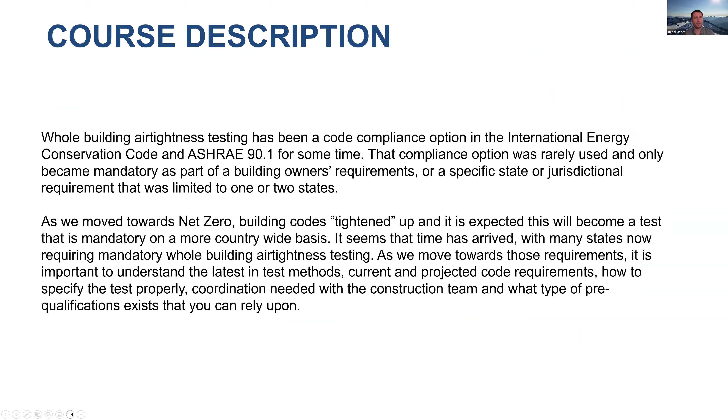So I'll just skip through the boring slides here. Essentially how it fits into the codes, energy codes, and some other green building programs, what that means for us now. We're going to talk about the current building code requirements, both national and some local code requirements, as well as some eco-friendly building programs that are getting more and more popular these days.

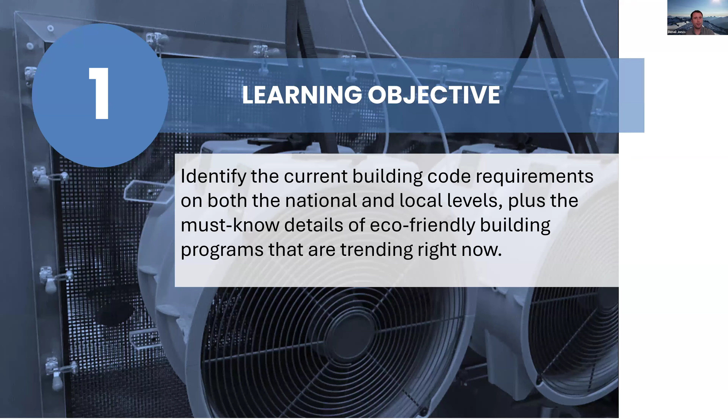We're going to talk about what the air tightness test does, what it provides us, and how those results can actually be useful. We're going to talk about the different test methods that are available, and you'll see a number of different test methods. We're going to break down why they're important or why they're applicable in certain situations and not others. We're going to go through some sample language from a guide spec and talk about some of the pitfalls that I see in specs all the time, how to avoid those.

And we'll talk a bit about some credentialing programs that you can specify that can help ensure that the people testing your buildings are qualified and know what they're doing. So we've got a lot of different supporting documents that the ABAA can provide you, including just things like this presentation. We're happy to deliver to local chapters or building enclosure councils or just even architecture firms. Education and outreach is a big part of what we do, so if you're interested, we've got lots of presentations available.

We also have a whole building airtightness testing manual that's actually for sale. That's one of the few things we provide that's not free, but it's a huge document that explains everything you need to know about whole building airtightness testing, and probably a lot that you don't need to know. It's hundreds of pages, essentially a textbook.

On the left side here, we have hot off the presses two new guide specs, one for air barrier requirements, and one specific to air barrier testing requirements. Those were just approved by the board literally days ago, so they're not published on our website yet, but they will be very soon. The testing spec also includes a report template, which is that document with all the yellow highlights. We're trying to standardize the industry as much as possible, so everyone's testing the same way, everyone's reporting the same way, and we can compare apples to apples. That's a big goal of ours, making sure everybody's on the same page, doing the same thing, and doing it right. So we've got a lot of different stuff we can provide that's helpful to specifiers, contractors, testers, you name it. We're a resource for the industry.

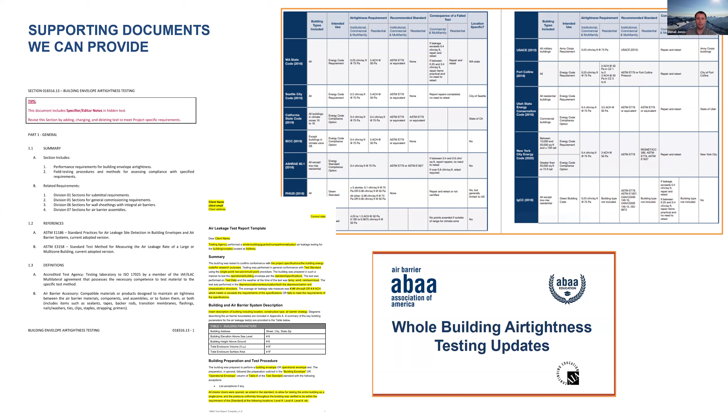But today we're going to talk about whole building airtightness testing. So we'll start big picture with the national code requirements. For a long time it was really just this dichotomy of test methods.

There's the material test, which is purely testing the airtightness of a single material, like a sheet membrane, a foam panel, or even just a piece of sheathing. Nothing else there. Then the next step up is the assembly test, where you test the air leakage through an 8x8 mock-up wall that's got penetrations, fasteners, electrical outlets, a fake window in it. So that's a bit more complicated, a bit more expensive.

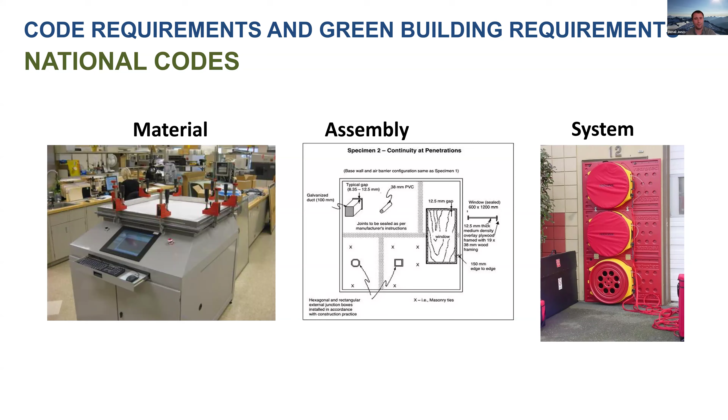And then the system test, or the whole building test, is exactly what it sounds like—you test the entire building as constructed. The codes, both IECC and ASHRAE, for a long time broke it down this way: you could either test the materials used for the air barrier and confirm they're airtight, test all the assemblies used and make sure they're airtight, or test the whole building. Surprisingly, not a lot of people chose testing the whole building—you can imagine that's a fair bit more complicated and expensive than just testing a material or an assembly.

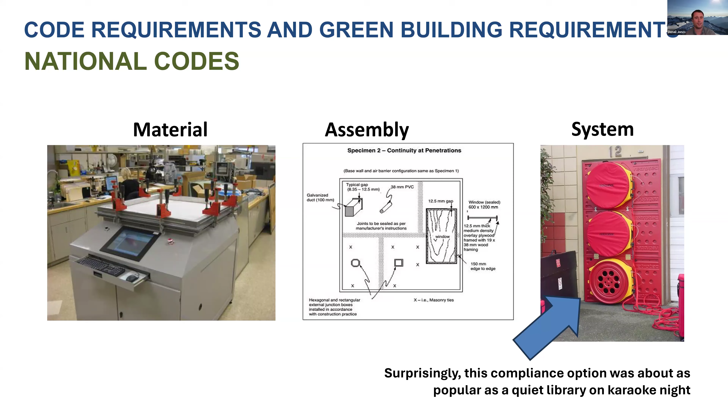So here are some of the requirements, this is from IECC—ASHRAE was really similar for a long time. The material test is ASTM E2178. The requirement to be an air barrier material is 0.004 CFM, cubic feet per minute, per square foot of the material, at a pressure difference of 1.57 pounds per square foot. So they pressurize across that material. The ASTM test calls for a 1 meter by 1 meter sample, and they measure the leakage rate of air through that material. If it's less than 0.004 CFM per square foot, or 0.02 liters per second per square meter, then it's deemed acceptable by code as an air barrier material.

And that requirement's still in there, still in the code, and they provide a list of materials that meet it. That requirement, the 0.004, actually came from drywall—that's where we got these requirements from. Historically, drywall was used as the air barrier on the interior side of the wall. They would just caulk all the penetrations and tape and mud all the drywall joints, and that was it, that was the air barrier. So when they were writing these code requirements, they just said, let's test a sheet of half-inch drywall and see what the leakage is. And they did, and it was 0.004 CFM per square foot—that was the number they got. So they said, okay, anything at least as tight as drywall is good enough as an air barrier.

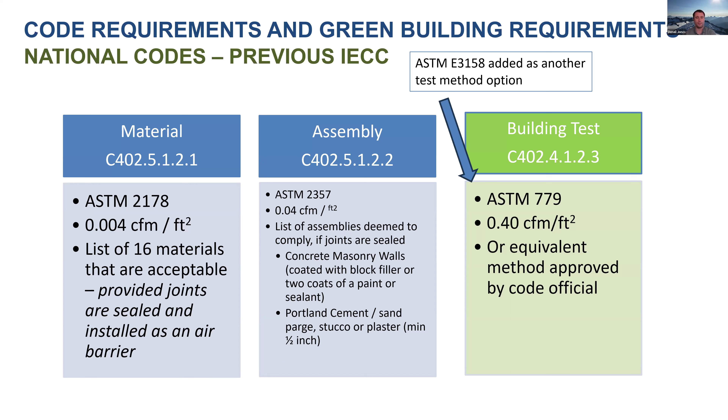These are just excerpts from a table in our manual, but these apply as an option for compliance. So the code essentially says you have to have an air barrier, and how you demonstrate compliance is either testing the whole building or using all airtight materials or airtight assemblies.

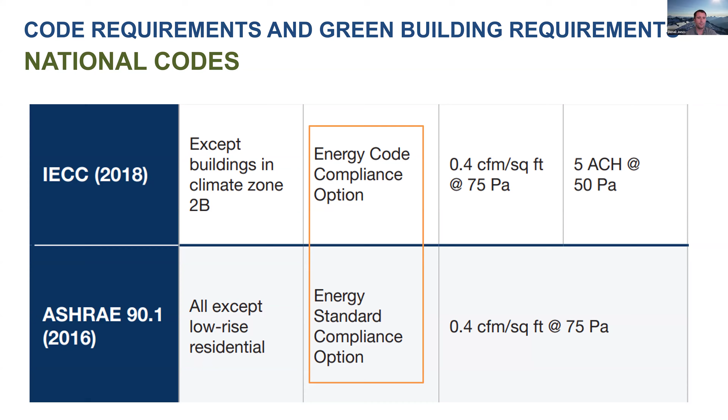So you have to meet the code, whatever the code says in your jurisdiction. But then you also might have additional requirements from green programs such as Passive House, or LEED might have test requirements for whole building airtightness as well. Or there could just be an owner that wants an airtight building for one reason or another.

A lot of institutional building owners tend to want higher performing buildings. So we see that in specs all the time where it's a hospital or a university or somebody that really cares about the performance and the durability of their building. They might specify something that's above and beyond code.

So you may have test requirements that are kind of conflicting, or one supersedes the other. The code is just the bare minimum, and then you may have some other requirement on top of that that should be clearly defined in the spec.

So let's talk about the national codes. I'm going to focus mostly on the 2024 IECC, which is an updated version of the 2021 IECC. But 2021 is where a lot of things changed dramatically in terms of test requirements. This is a little chart I put together, which is a bit hard to read and convoluted, so we're going to go through it in more detail here.

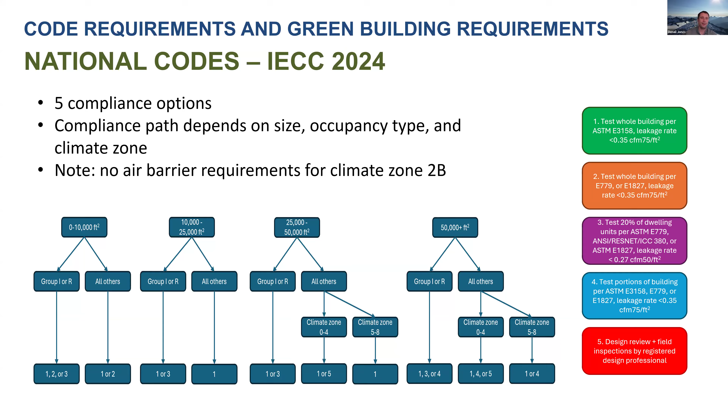All right, so if we break this down a little bit, let's look at smaller buildings. You'll notice anything under 25,000 square feet, there is no distinction between climate zones—it doesn't matter what climate zone. You'll also notice that option 5, the design review and field inspections, that is not an option in any of these scenarios. So essentially, if you're under 25,000 feet, you have to test. There's no exception around it—you just got to test. And what type of test you can do is really going to be any of the first 3 options: test the whole building or test a percentage of dwelling units.

And that's how they handle smaller buildings. So group I or R would be something with dwelling units—that's multifamily apartments, residential buildings, and essentially anything that has a long-term sleeping unit, dwelling unit. So not like a hospital, but maybe a long-term care facility.

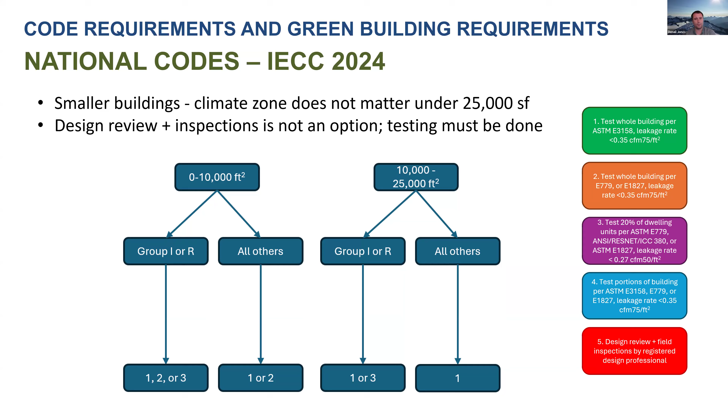You'll notice option 2, that's testing the whole building per ASTM E779 or E1827. The reason that's allowed is these are smaller buildings, and we'll talk more about that in a later slide, but really for larger buildings, you don't want to be using those test standards. That's why option 1 is really the only option for larger buildings, which we'll see here. This is where option 2 goes away if we're above 25,000 square feet. So this is 25,000 square feet plus.

This slide here—you'll see that colder climates are definitely more restrictive. And then once we get above 50,000 square feet, that's where partial building testing is allowed. So you're allowed to test just a sampling of the building itself.

And then this option 5, the design review and inspection—so omitting testing altogether—that's only available in warmer climates, so climate zones 0 to 4. Climate zones 5 through 8, you have to do some kind of test. You cannot get out of it.

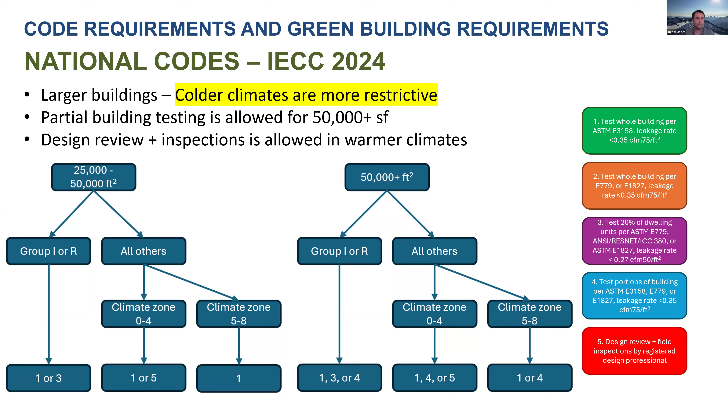Now, what do we do if the test fails? Well, there is what we call an oops clause—that's not what's written in the code, but this is the name we've come up with for it. So if you're going with option 1, 2, or 4, basically, if you test and the result is greater than 0.35, which is the code requirement, so that's a fail, but it's less than 0.45, then you're in this kind of in-between zone where it leaks bad, but not so bad that it's a total disaster. So you find leaks—that's a different standard we'll talk about here in a little bit, ASTM E1186, how you would find the leaks—and then report the leaks and propose corrective actions to the code official and the building owner.

And then that's it. There's no requirement—well, you're required to, I think it has language around, you're required to fix leaks that don't require tearing stuff off the building. So they won't make you pull cladding apart. They're not going to make you reglaze windows or anything like that. But if it's kind of low-hanging fruit, just easy stuff that was missed that you can fix without destroying the building, you're required to fix that, but nothing else.

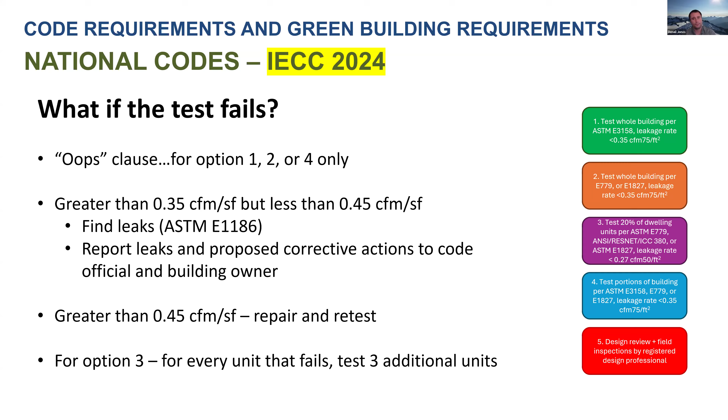All right, so let's talk about ASHRAE. The ASHRAE 90.1 is actually simpler than IECC. You'll notice that option 3 and 4 are not part of ASHRAE 90.1.

They have essentially the same language around testing the whole building, if it is, and their threshold is 10,000 square feet, so it's even smaller. Essentially, if it's 10,000 square feet or less, you have to test the whole building.

And they have a very similar oops clause. It's also 0.35 to 0.45, that's the range. If it's greater than 10,000 square feet, you perform the whole building test, or you can do that option 5.

And there's no distinction for climate zone or occupancy type. It's the same regardless. There are a couple other exceptions for semi-heated spaces in climate zone 0 to 6 - don't need to do anything. And then single wythe CMU buildings only in climate zone 2B, you don't need to do anything. Some kind of weird legacy exceptions in there, but that's kind of the way ASHRAE 90.1 breaks down.

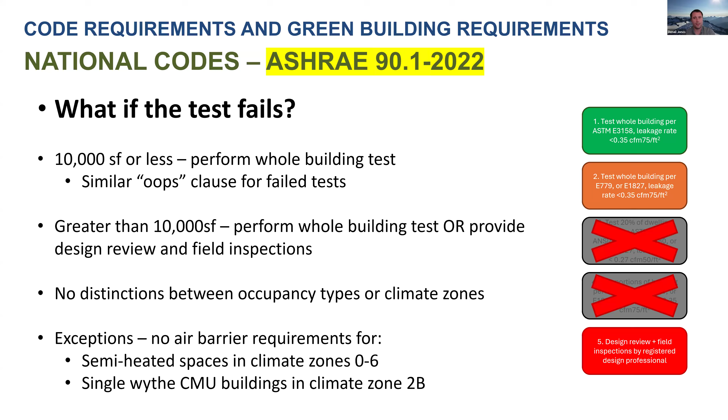So let's talk a bit about local jurisdictions. This is where it gets really complicated because so many different jurisdictions take either IECC or ASHRAE 90.1 and modify it or do their own thing with it.

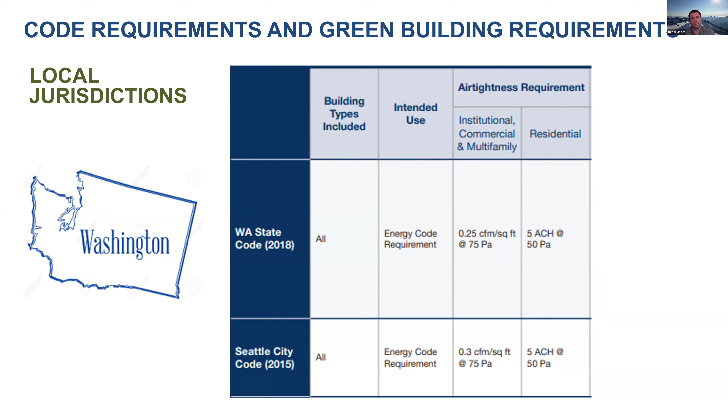So one example is where I live - I'm in Seattle. So Seattle, there's first of all the Washington State Energy Code, which is based on IECC. They took that code and made it more stringent. And then the city of Seattle actually took that and adds additional language around it as well. So there's so many different variations of this throughout the country.

So a failure in Washington State - this is from the 2015 code, I think, it's a little different now - but essentially, if leakage exceeds 0.4, then you have to repair and retest, which is above and beyond what the national code says. And if it's between 0.25 and 0.4, that's sort of the oops clause there that comes into play for Washington State.

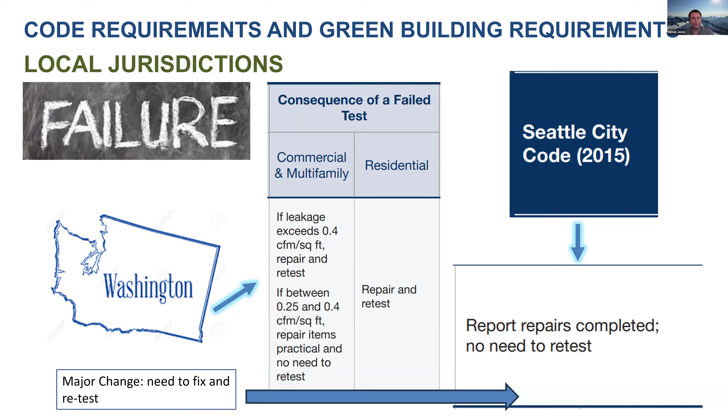So this is a big deal to know what's required in your local jurisdiction. I don't know if we have any Californians in the chat, I haven't looked yet. But California has their own climate zones because they're special, and they've got requirements in certain climate zones and not others for testing and retesting if it's a failure.

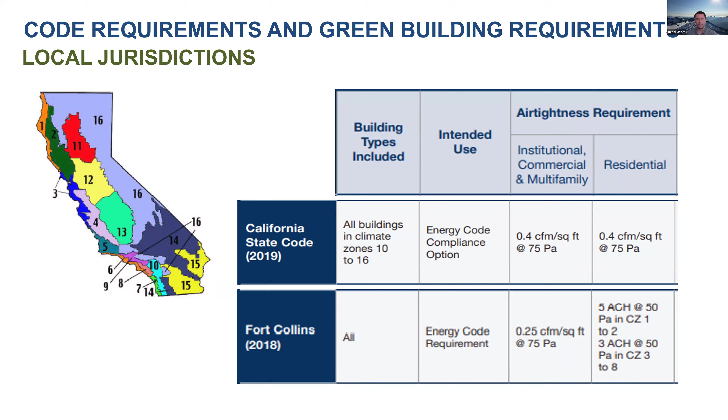Fort Collins is another example of a local jurisdiction that has a pretty strict air barrier requirement that the rest of Colorado does not. And then in the California State Energy Code, if you fail the test, there basically isn't any consequence - you just have to report that you failed. You don't have to repair, or at least that was true back in 2019.

But Fort Collins, however, they have no oops clause. If you fail, you fix it and retest and keep retesting until you meet it. So very different scenarios for doing the same type of testing.

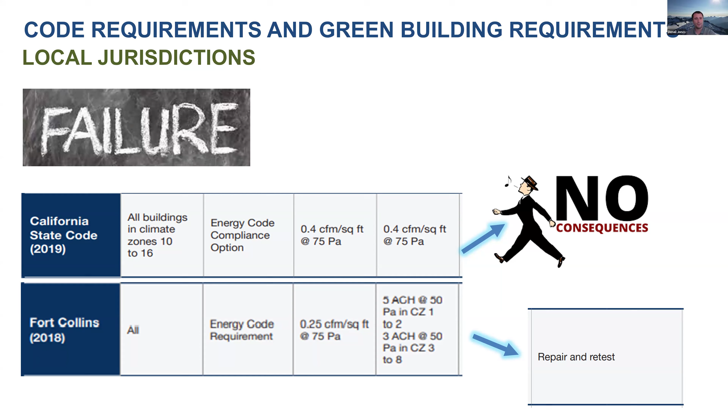So this is why I get asked frequently, hey, what are the code requirements in, I don't know, Cincinnati or Phoenix or whatever, and I always have to say, well, I don't actually know that because there's so many different variations of this in local jurisdictions that I'd have to spend the time to look it up. So you got to know the code in your local jurisdiction.

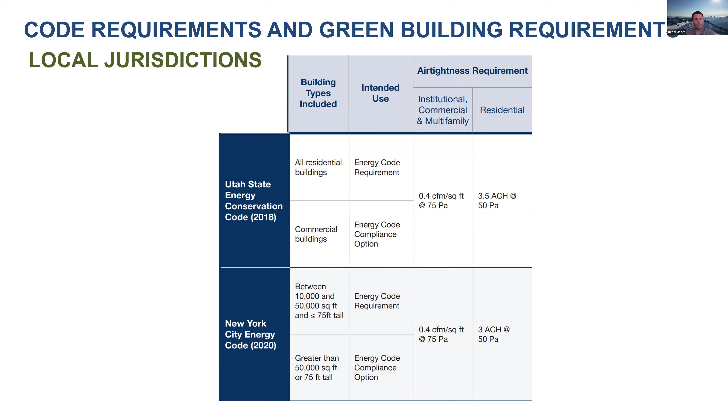Utah is another one that has requirements for some buildings and not others, and it's different for residential versus non-residential. New York City has requirements as well. And so lots of different ways that you can test, and also what happens if you fail is going to be different in a lot of cases.

Green building programs - two of the big ones are Passive House and LEED. You'll notice, the current IECC requirement was 0.35 CFM per square foot. Passive House, which is kind of the gold standard for airtightness, is 0.08 CFM per square foot - so way tighter than the code minimum. Just to give you some perspective on what a really tight building is, that would be Passive House.

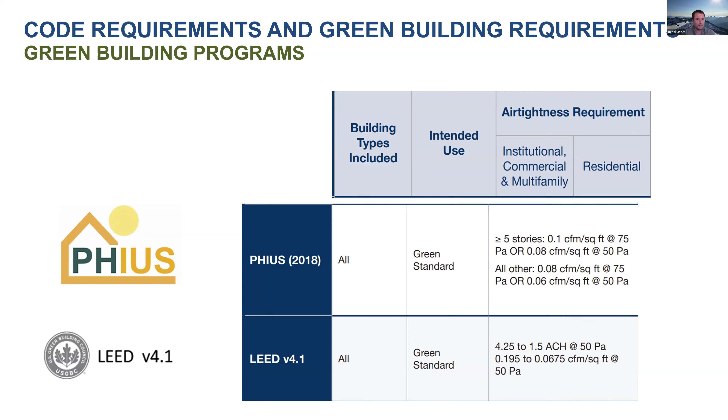LEED also has some requirements for various points that you can get. And the consequence of failure for these is pretty cut and dried. If you don't meet the Passive House requirement for airtightness, you don't get certified as a Passive House project. If you're going for LEED points and you don't meet the airtightness goal, you don't get those LEED points. Period. There's no oops clause.

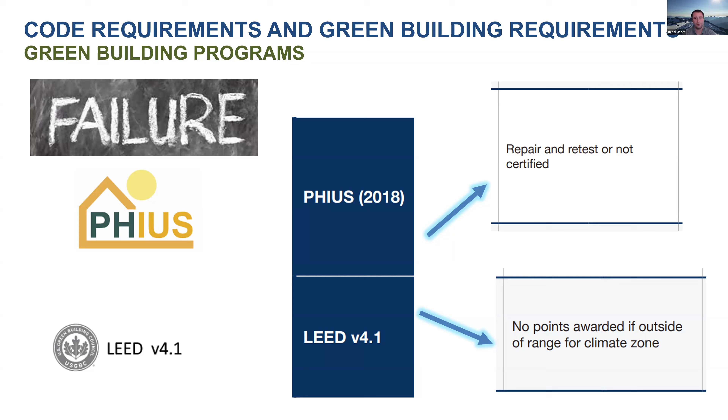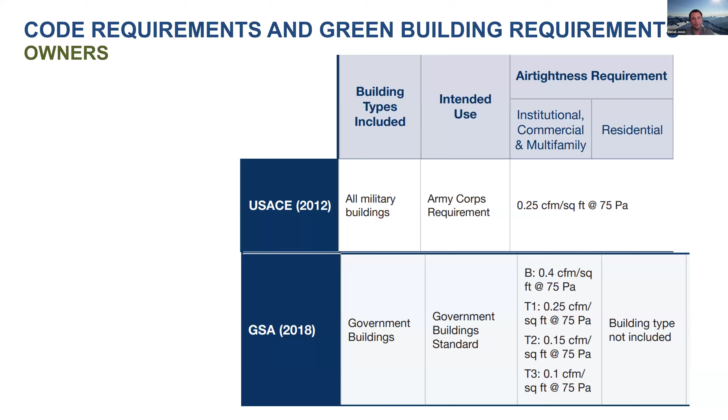There's nothing like that, it's just you have to meet those requirements, or you don't comply with the green building program. The Army Corps of Engineers has been doing airtight buildings for a very long time, which then kind of bled over into the GSA for any federal government building. They have different tiers they can meet, and those are both pretty strict. If you don't meet those, you have to repair and retest.

Let's talk about the different test methods. I've talked about a lot of different ASTM standards here. There are many more, but I don't want to get too far into the weeds on this, so I'm going to try and keep it high level.

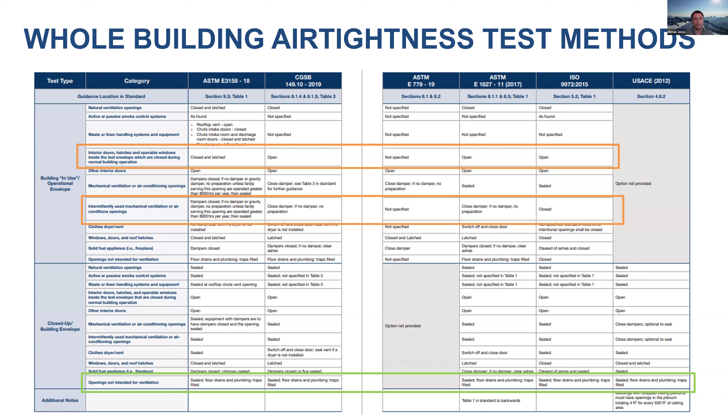This is another one that's really important: pressure uniformity is going to be essentially the same or very similar for a lot of these test standards, and we'll talk about why that is here.

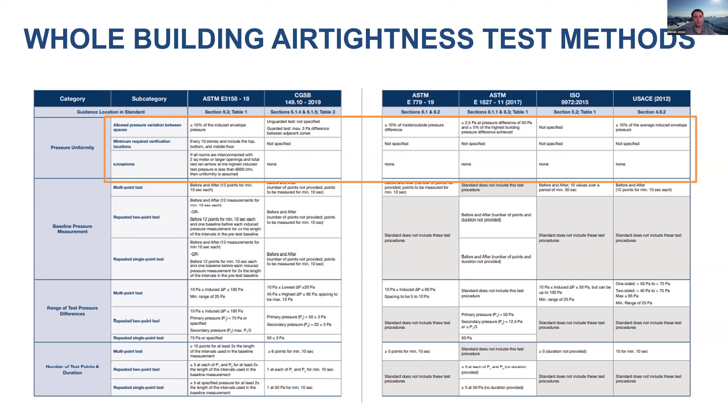But let's first get into the basics of what whole building testing is. In the simplest version possible, think about a fixed volume, which is your building. Any flow you put into the building, air that you pump in, has to equal the flow out of the building, assuming the pressure in the building is constant. So constant volume, constant pressure, flow in equals flow out—that's conservation of mass.

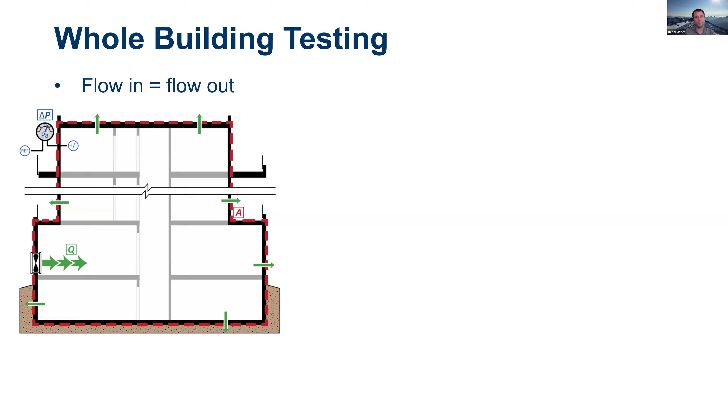Our flow in could be through the blower door, which is just a big fan. Our flow out is the leaks, since we're trying to measure the leakage of the whole building. So we close all the windows and doors, seal everything up, and blow air in through the fans. Then we assume that flow out is going to be the same as the flow in. So it's a funky thing—you're not actually measuring airflow through the leaks, you're measuring airflow through the fans, and then assuming it's the same as the air out through the leaks.

Where it gets complicated is as the building gets bigger, you can't just have one fan blowing air in. You need a bunch of fans—a lot more volume of air than one fan can do. So you've got to link all those fans together, measure pressure in a whole bunch of different places, and control everything simultaneously. That's where this gets tricky. But conceptually, that's all you're doing—blowing a bunch of air in, measuring it, and equating that to flow going out through the leaks.

The reason you have to measure a bunch of pressures is you want to make sure you're actually getting the same pressure throughout the whole building. We call that pressure uniformity. So if we've got a 10-story building and a bunch of fans on level 1, we want to make sure we're actually getting the same pressure on level 1 as we are on level 10, so the air is actually reaching every part of that exterior envelope.

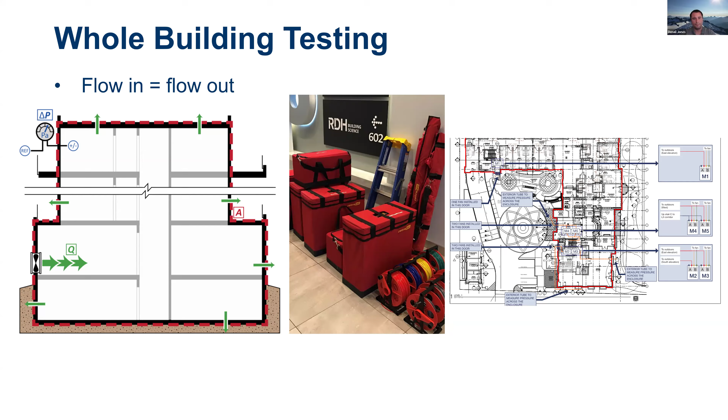Actually, it's a bit of a misnomer to say we're measuring airflow—we're not actually measuring airflow, we're measuring pressure. The fans have openings on the inlet side, and we're sucking air through that opening. We know how big that opening is because it's been calibrated to a specific size and shape. So we measure the suction pressure, called the fan pressure, through the fan across that inlet. Then we know what the flow is through that opening because we know its size and shape, and we know the pressure across it. So it's all just measuring pressures, really. But we can quite accurately determine how much flow is going through each fan, add that all together, and then we get our leakage rate.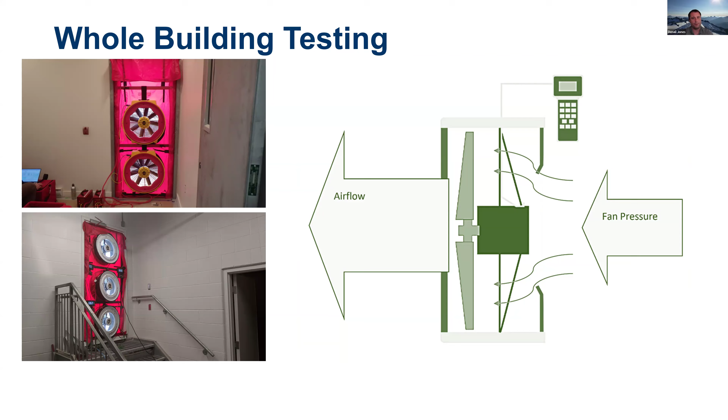So this gets difficult in a number of different ways. Very tall buildings or very large indoor-outdoor temperature differences can make things difficult. If it's really cold outside and warm in the building, that's tricky. Lots of wind or highly variable wind can make things tricky when you're trying to measure stable pressures. Buildings with multiple zones—I'll talk about why that's tough. Leaky buildings are just harder to test in general, and multifamily buildings—I'll talk about why that is too, in a second.

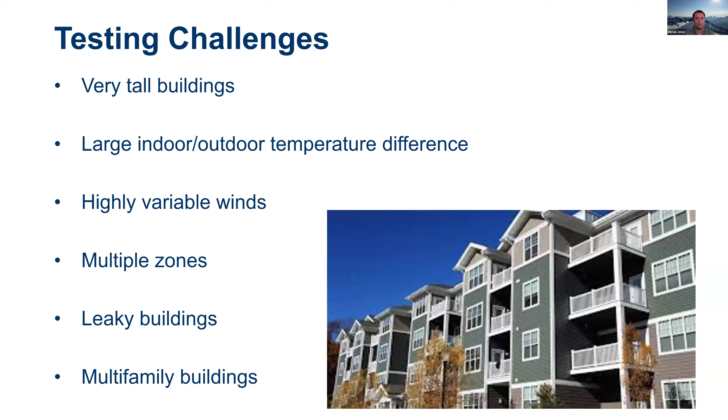So the first two are kind of one and the same: very tall buildings or very large indoor-outdoor temperature differences. This is due to the stack effect.

Stack effect is really just the fact that warm air is less dense than cold air. The warm air will rise to the top of the building, and it's going to try to force its way out, which draws cold air in at the bottom. So you get a positive stack pressure at the top, pushing out, and a negative stack pressure at the bottom. This is also sometimes called the chimney effect, and this is how chimneys work.

But this can be difficult in tall buildings because it's proportional to the height of the building, and also the temperature difference. Those are the two things that make the stack pressure bigger. Taller building, more stack; bigger indoor-outdoor temperature difference, bigger stack. Your fans basically need to overcome this stack effect, and the bigger it is, the harder it is to overcome. This is only a severe limitation in very cold climates or in very tall buildings.

I'm talking like 30, 40 stories plus - that's when it can start to get tricky. So this is a pretty small subset of buildings where this is really a big factor. But it is something to know about if you're working on a high-rise building in Chicago and it's going to be tested in January - that could be an issue. That could be something where you'd consider testing portions of the building and not the whole building.

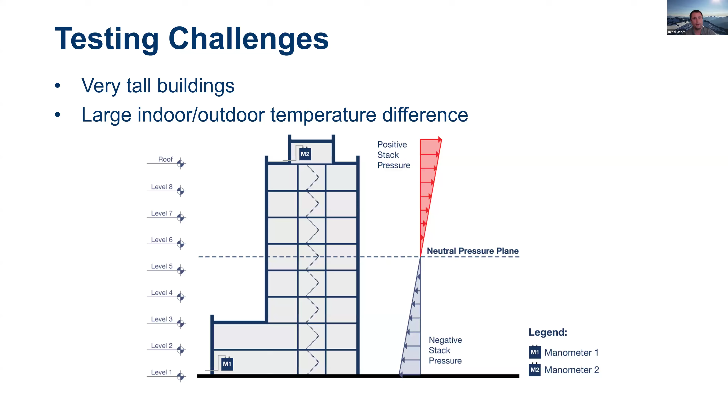Wind is the next one. Fairly obvious why this is a problem - you're trying to get stable pressure readings, both indoors and outdoors, and that's hard to do if it's a really windy day. So this can make testing quite challenging.

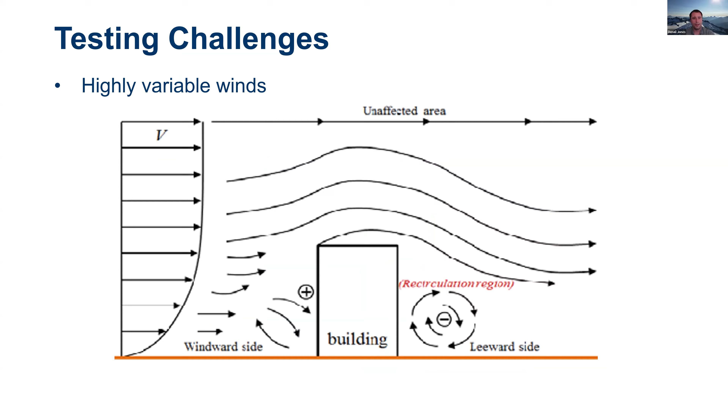Multiple zones can be difficult, and this is really just logistically challenging from the testing point of view. You've got to make sure that if you're testing the whole building, but it's chopped up into different sections, you simultaneously pressurize those sections and get them to the same pressure all at once. So that's difficult to do. Sometimes this is just inevitable and you have to do this with the way the construction sequencing goes, but it makes it challenging.

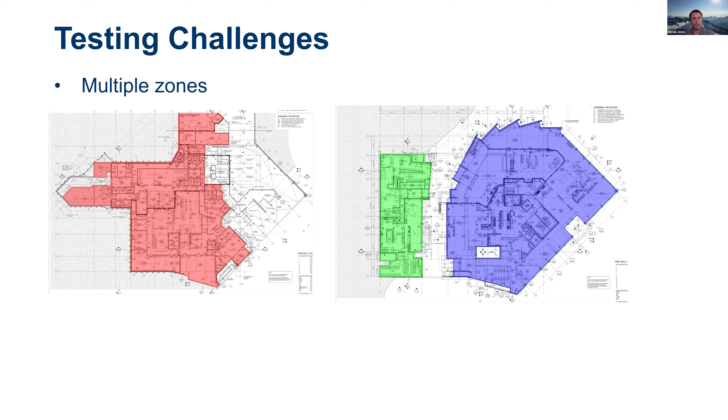Leaky buildings and multifamily buildings are kind of lumped together because they are one and the same a lot of the time. Multifamily is leaky just because you've got a ton of different penetrations - exhaust penetrations, range vents, bathroom vents, dryer vents - usually something like four exhaust fans per unit. You've got your stove, your bathroom fan, your dryer, and then usually another whole-house ventilation fan somewhere.

So the goal of the test is to measure leakage through the air barrier, not measure leakage through the HVAC systems. It's trying to figure out how well put together all the sealant joints, tapes, and membranes are - not how much flow goes through your ductwork. That's kind of a different concern.

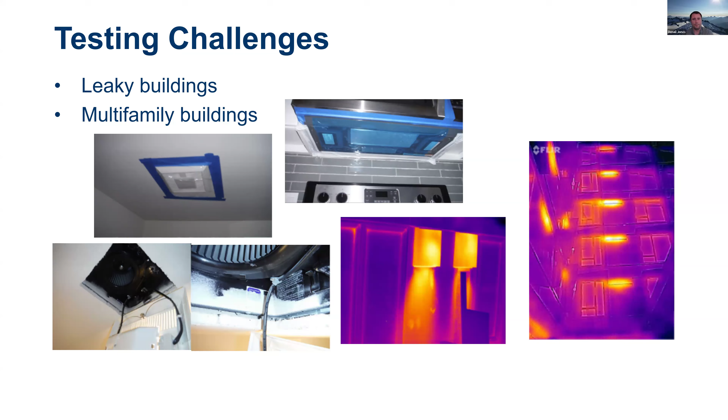All right, so let's talk about multi-point testing. This is what we're actually doing when we're getting data - we're measuring pressure and measuring flow at multiple different pressures. This allows us to develop a characteristic flow curve for the building, so we can actually tell you what the leakage rate is at any pressure.

So we're reporting the leakage at 75 pascals, or 1.57 pounds per square foot. That's what the code requires for reporting, but we're actually testing at a bunch of different pressures.

This would throw up a lot of red flags in the testing software telling you to go check this out. But if you were just to test at 75 pascals, crank your fans on and get a number, you wouldn't know this is happening. You'd have no idea because you only have one data point, so you don't really know how good that data point is. You don't have that smooth line to tell you the building is holding steady and nothing's blowing open.

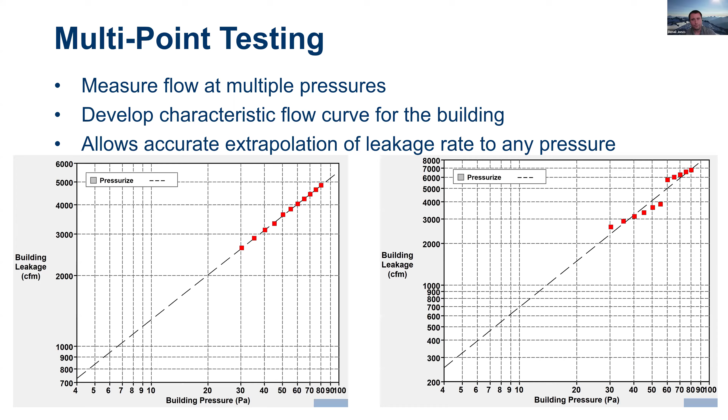ASTM E779, this is one of the multi-point test methods. It was kind of the gold standard for a long time, the only thing that was around. It was developed in the 80s and was really written for testing single-family homes. Nobody was testing large buildings back then.

If you read through this carefully, it's got really strict limitations on weather conditions. It requires testing at really low pressures, so if you're trying to get a stable reading at a low pressure, things like stack effect and wind are really, really difficult and prohibiting to test at. It offers very little guidance on how to actually prepare the building. It talks about stuff like closing the chimney flue, and it's very clearly written for testing a house. It has no guidance on what to do with a DOAS system on the roof or an elevator pressurization fan. It's not written for those types of buildings.

So a lot of the guidance on how to prepare the building is very limited and kind of left up to the tester's interpretation. It also only requires taking 5 data points, so flow at 5 different pressures.

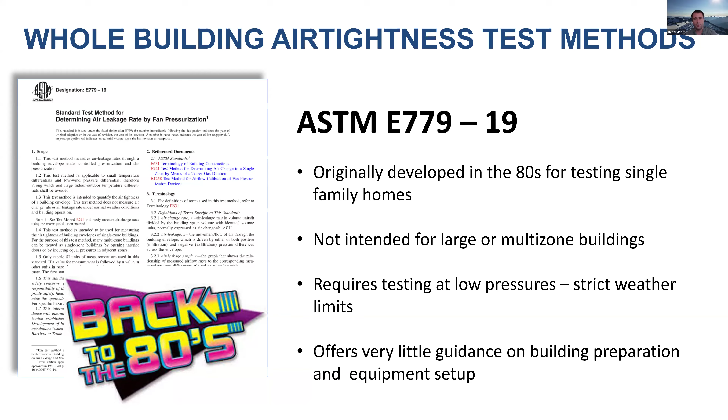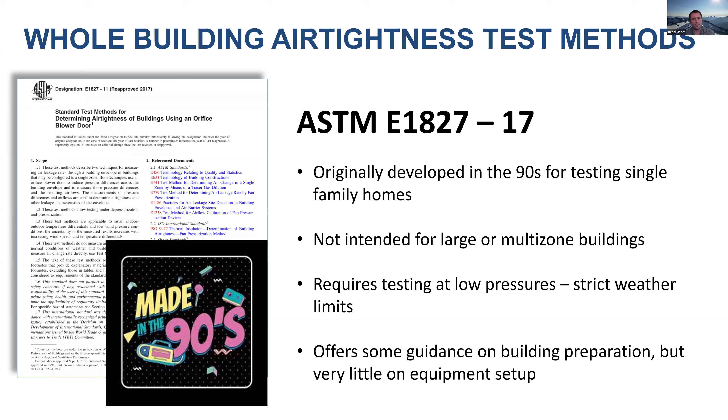Both E779 and 1827, I'd say are still fine for testing small buildings, which is why in the code that option is for buildings under, I think, 10,000 square feet. You can test a small building if you've got good weather, but again, the weather windows are small with these tests.

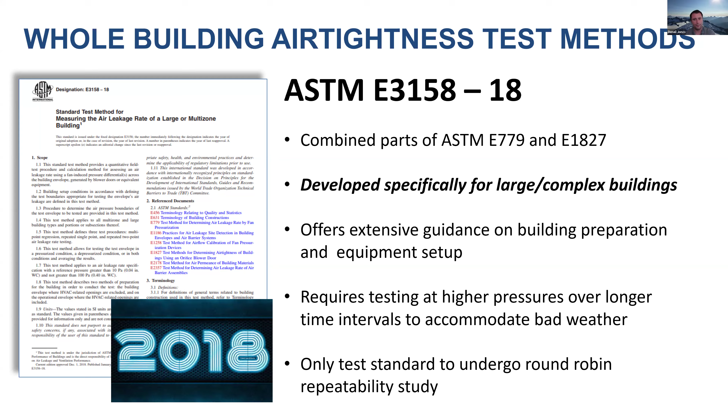So how do we specify ASTM E3158? There are 4 things that you need to actually have in the spec. The first is a reference pressure, the pressure that results are reported at. Typically this is going to be 75 pascals, which is what the codes reference, but it's up to the specifier to write this into the spec.

It also allows you to test pressurization or depressurization or both, meaning the directions the fans blow into or out of the building. We recommend both. In most scenarios, that's going to give you more accurate results.

There may be some odd scenarios where one might be more appropriate than the other. A situation I've run into is testing an addition to an existing hospital, where the hospital was operational during the tests, and they were very concerned about blowing contaminants into it. So we just depressurized, we did not pressurize. There are oddball situations like that, but this needs to be specified. Which direction are you testing, or are you doing both?

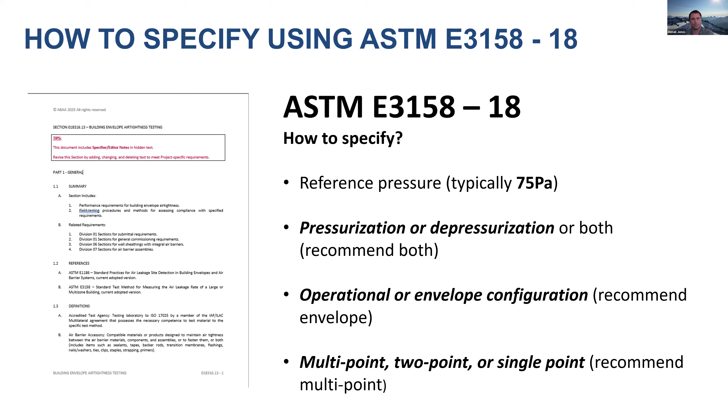All right, so let's see — gotta speed up here, just realized what time it is.

So we've got spec language here — again, these are just some notes added into our spec that's going to be published very soon. You need to specify operational or envelope, the test mode (pressurization, depressurization, or both if applicable), and include the multi-point procedure as the test method. You also have to specify the maximum air leakage rate — either 0.35 or whatever the requirement is you're trying to hit.

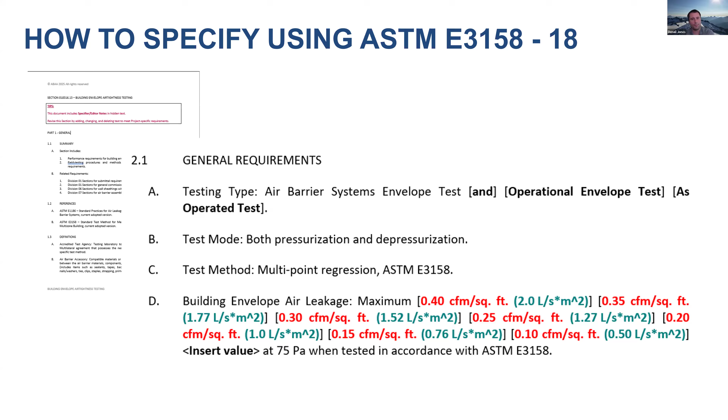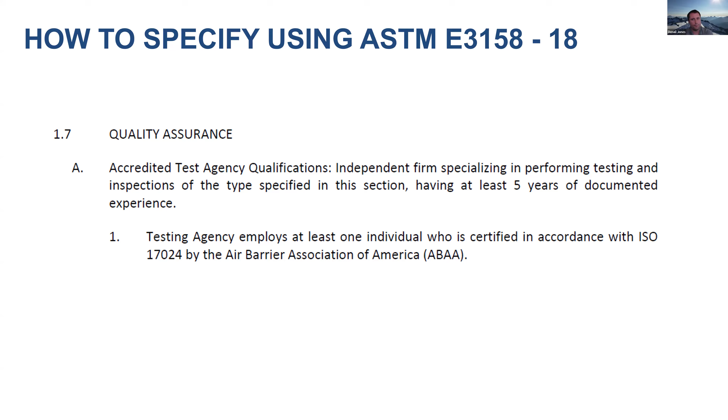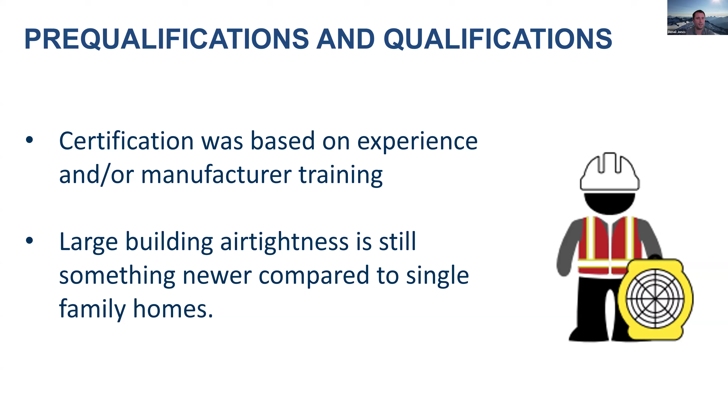I'll quickly go through part one of this spec. We have language in there for accredited testing agency qualifications. ABAA actually offers an ISO 17024 accredited training and certification program for teaching people how to do this — it's a very extensive course. We developed it with support from the blower door manufacturers, and we have a certification program that goes with it, which we'd definitely recommend specifying. We've got many people certified now, and we're trying to get the industry up to speed on how to test large, complicated buildings. It's a full week-long training course, and you can include that in your specifications.

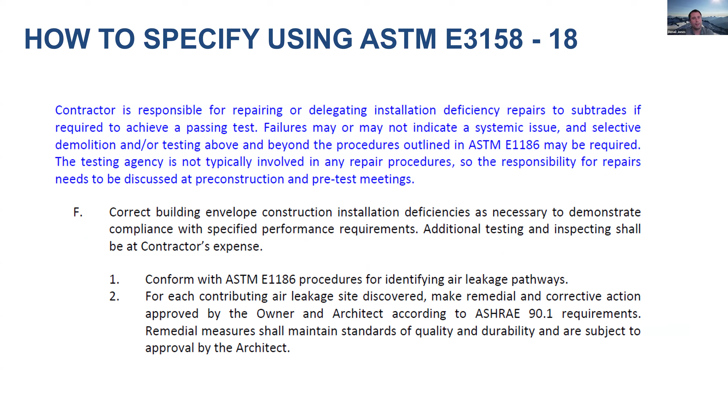We also have language in here about what to do if the test fails, contractor responsibilities at that point, and how to identify those leaks. I don't have a ton of time left here, but...

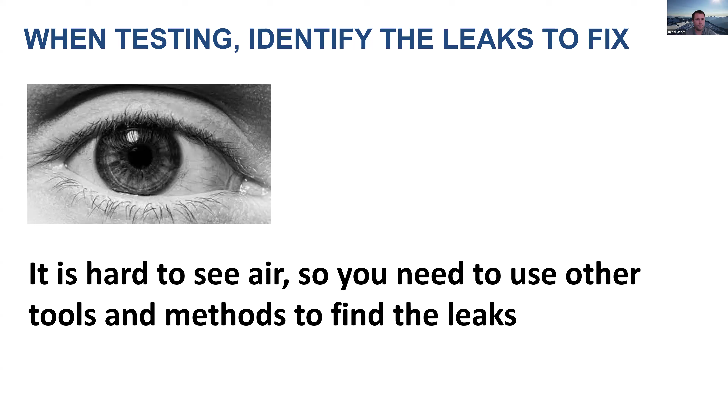How do we actually find air leaks? You can't see air with your eyes, so you need other ways to identify it. There are a bunch of methods, but the two most commonly used are infrared thermography and smoke.

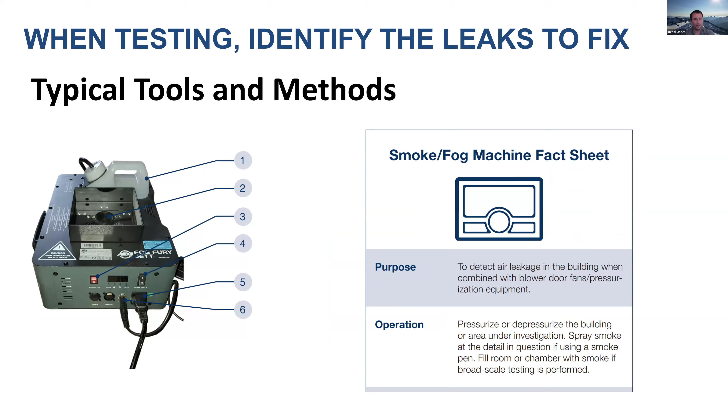Smoke is pretty simple — it's just a way to visualize airflow. If you've got the building pressurized and you put smoke near a leak, that smoke will get blown out through the leak and you can see it. Or if the building is depressurized, you can smoke from the outside; it will suck air in and you'll see the smoke move.

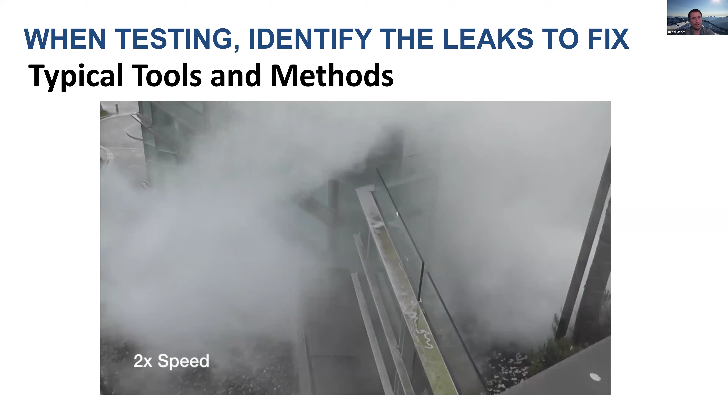Hopefully this will play here — this is just some examples of smoke testing. You can see this is a pretty bad leakage rate on this building, with smoke pouring out while the building is under pressure. It's a way to visually identify air leakage pathways, because this air is flowing out all the time, but you can't see it unless there's a visual cue.

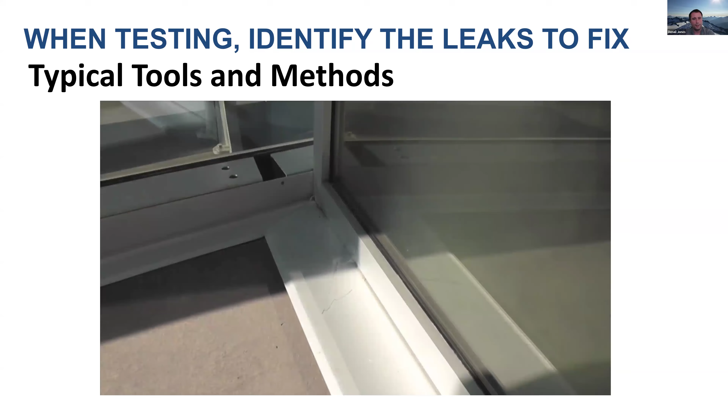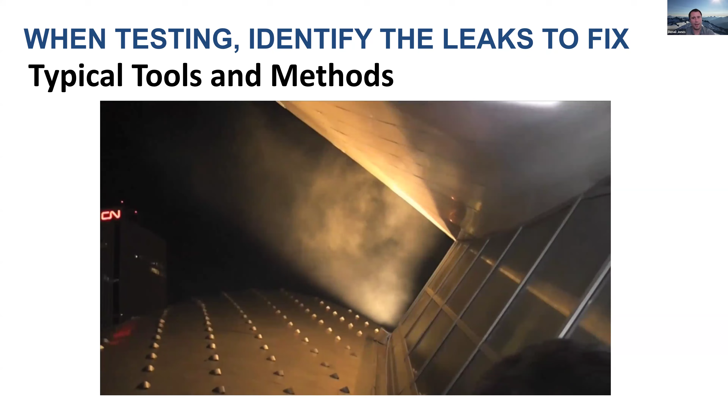A lot of these are from forensic investigations of existing buildings that were having lots of problems, so of course the leaks are going to be pretty dramatic, but you can do this on new buildings as well. Infrared thermography is again just a visual tool.

You'll see air that's a different temperature flowing over these surfaces, and it will highlight them. But that's a whole different training course on infrared thermography in buildings. I'll wrap this up here: whole building airtightness is going to become more and more required in the future. It's really important to understand all these test methods are not the same. There are big differences in how they should be applied.

We're going to give you this spec here very soon. It's going to be on the website, and that will make this presentation very short. You just need to make those 3 or 4 decisions about reference pressure, test method, and test direction, etc.

But the test itself is actually quite complicated. Getting good, reliable, accurate data is not easy. Setting up the building is not easy. Setting up the test equipment is not easy. This is why we developed this training course, and really having these qualifications and expertise is very important, and we want to stress that.

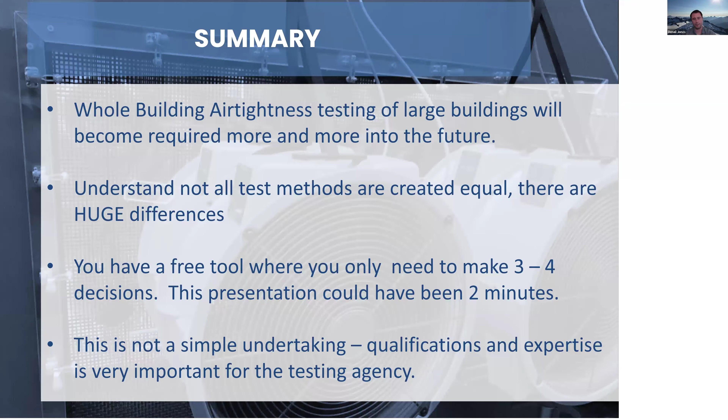There is some language now in ASHRAE and IECC talking about qualified testing agencies. They don't specifically require our training, but we want to make sure that the people doing this kind of testing actually know what they're doing. All right, that's all I got, and happy to answer questions.